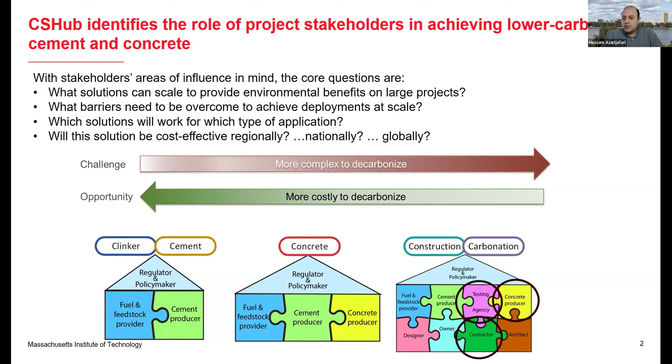This part of the webinar is about the potential impacts of over-design and strength variability on the life cycle carbon emissions of concrete.

Let's start by understanding how over-design contributes to greenhouse gas emissions and costs in ready-mix concrete. Over-design occurs when concrete is produced stronger than the specified strength, creating a safety margin for strength compliance. While this ensures quality control, it has significant environmental and economic implications. As we increase over-design, we need more binder and cement, which directly translates to higher GHG emissions and costs.

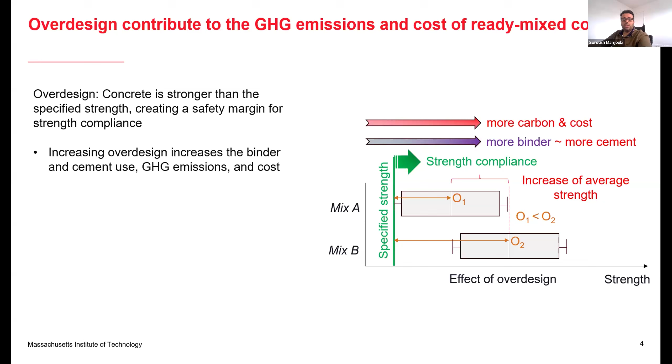This diagram shows two concrete mixes, Mix A and Mix B, where Mix B has greater over-design than Mix A, represented by orange markers O1 and O2, showing the relationship between over-design levels and environmental impact.

Now let's examine the quantitative impact of over-design across different strength classes. We define over-design as how much the observed average strength exceeds the specified strength, using the formula shown here. This violin plot shows the distribution for a 2000 PSI mix, where the average over-design exceeds 50%, with the 95th percentile reaching about 120%, and the median sitting around 50%.

Our analysis reveals a pattern: lower strength mixes carry the highest over-design, with some exceeding their specified strength by up to 150%. But for higher strength mixes above 6000 PSI, the average over-design drops to less than 25%. This is because higher strength mixes are more expensive to produce for ready-mix companies, and achieving strength beyond specification is already more costly for these productions.

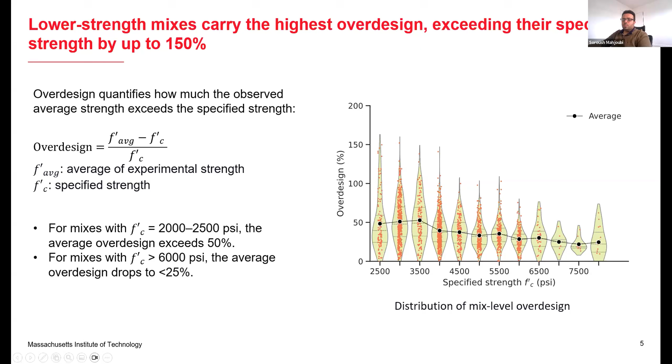Now we investigated the over-design compared to the ACI safety margin, and our study shows that over 90% of mixture codes exceed the conservative ACI safety margins.

These violin plots show the distributions of observed compressive strength, found using experimental tests, across different specified strength levels. The green and blue lines represent the minimum required average strength without sufficient historical data according to ACI 318. These thresholds are conservative, and it's logical that the mix codes lie inside the green space shown in this figure. But we can see that most of the average strengths consistently fall well above these conservative thresholds, suggesting there is significant room for over-design optimization without compromising safety, which could lead to substantial reduction in carbon emissions and costs.

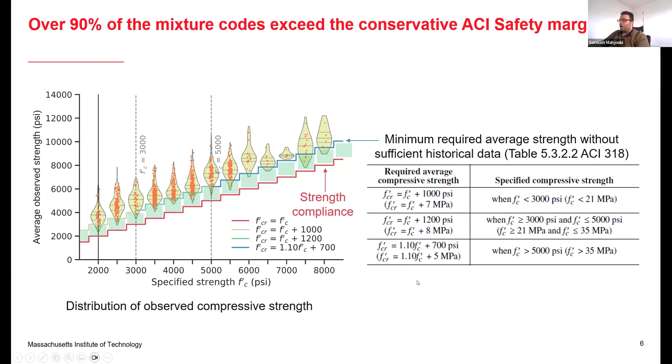Beyond over-design itself, strength variability plays a crucial role in driving carbon emissions and costs. Variations in strength indirectly increase the over-design because producers must maintain a safety margin to ensure compliance.

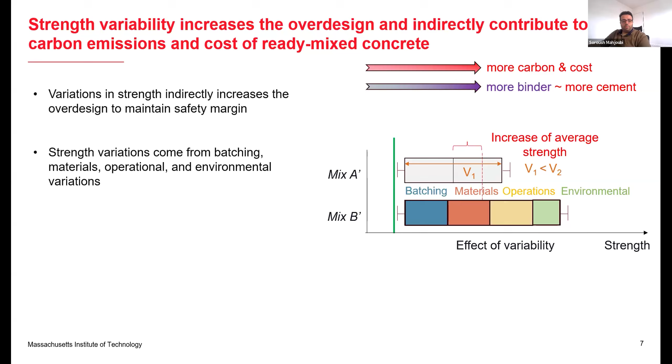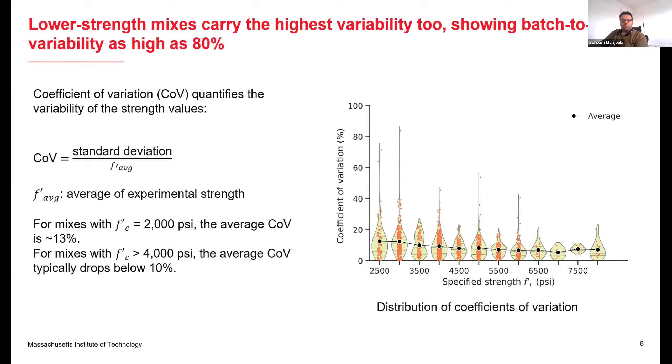Just as we saw with over-design, lower strength mixes also exhibit the highest strength variability. We quantify this using the coefficient of variation, which is the standard deviation divided by the average experimental strength. These violin plots show the coefficient of variation, demonstrating that variability decreases as specified strength increases. For 2000 psi mixes, the average coefficient of variation is around 13%, with some batches showing variability as high as 80%. These extreme batch-to-batch variations across mixture codes create significant quality control challenges. In contrast, for mixes above 4000 psi, the average coefficient of variation typically drops below 10%, primarily because of better quality control in these more costly productions.

We have also investigated the impact of laboratory test variations on strength over-design and variations. External laboratory testing introduces another critical source of variability that significantly impacts concrete strength compliance and risks, and this is part of the operational variations.

Our analysis shows that internal labs report a coefficient of variation of around 6%, while external labs can reach up to 13% for this specific mix code, due to inconsistency in sampling, handling, and testing procedures. The higher variability directly translates to increased non-compliance rates, with external labs showing failure rates of 3.6% and 4.5% compared to internal labs. These non-compliance risks create substantial business impacts, including costly rework and project delays.

The coefficient of variation also differs across different labs, as you can see in the blue lines in this figure.

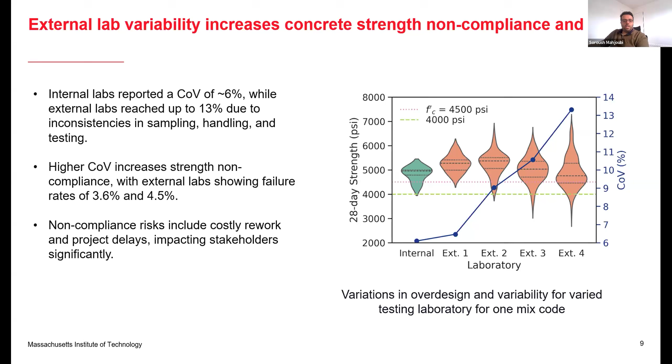To quantify the carbon impact of over-design, we developed a comprehensive data-driven modeling approach using batch-level operational data. This figure shows the fundamental relationship between carbon emissions, mix proportions, and observed strength.

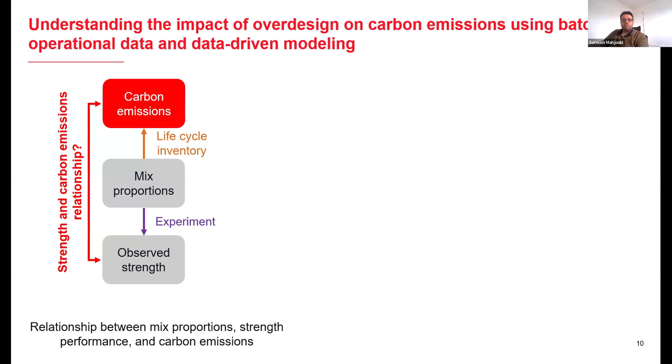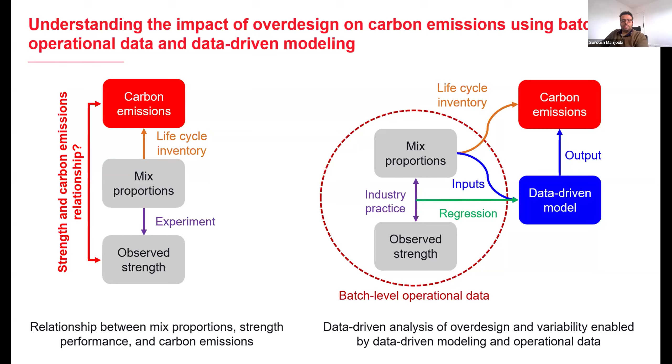This is how the mix proportions relate to observed strength and performance. On the right-hand side, our integrated modeling framework combines real industry practice data with regression analysis to create a data-driven model that connects observed strength with carbon emissions. By using actual batch-level operational data, we can capture the true environmental impact of current industry practices and over-design.

We developed a simple symbolic regression model to establish a relationship between mix proportions and GHG emissions. On the left-hand side you can see the goodness of fit for this model, and the root mean square error is about 7 kilograms CO2 per cubic meter. On the right-hand side, these figures represent the relationship between the 28-day observed strength versus the cement clinker, SCM percentage, and admixture dosages.

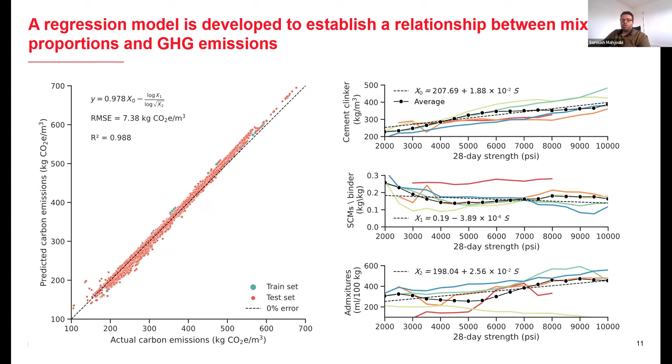Each line color represents a company, and as you can see here, each company has its own strategy in strength gain. We use the linear regression model here as input to the symbolic regression model, and at the end, we're able to relate over-design and strength variability to the excess carbon emissions.

In these two plots, I'm showing the over-design percentage and coefficient of variation against the excess GHG emissions for different specified strengths. We can see that by increasing the over-design, the carbon emissions increase linearly, but the impact of over-design increases as the specified strength increases.

And on the right-hand side, we considered 99% compliance with a z-score of 2.33. And we use the ACI formula to relate the strength variations to the overdesign here.

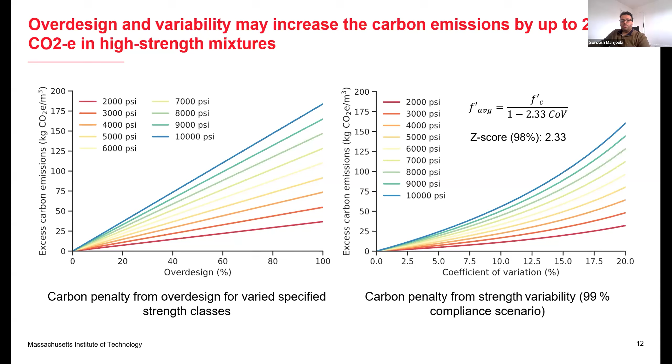And we found that, again, the coefficient of variation has a significant impact on the carbon emissions, and the relationship is non-linear. For higher strength mixes, the impact is more significant, and it can induce carbon emissions up to 200 kilogram per cubic meter for high strength mixes.

Here, we developed an overdesign versus coefficient of variation space, and we wanted to show the excess carbon emissions in this space. Each dot represents a mix code in industry, and we compared the average overdesign and coefficient of variation with 99% compliance according to ACI, and no excess overdesign.

So for 4000 psi here, we can see that there is a gap between the average and the no-excess-overdesign dot, which represents an opportunity to reduce the overdesign but keep the safe margin up to 99% compliance.

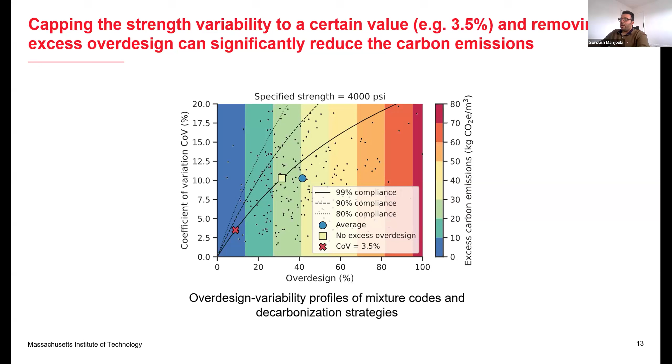And there is another opportunity here, which is that we can actually reduce the coefficient of variation and reduce the overdesign together to achieve higher GHG gains. We consider 3.5% coefficient of variation here just to show that we can have higher GHG gains by doing that.

Okay, the next part of this presentation is about the impact of different input variations, such as materials, batching, and plant variations, on the strength of concrete. We use an interpretable AI method called SHAP to get some insights from the predictions of the machine learning model.

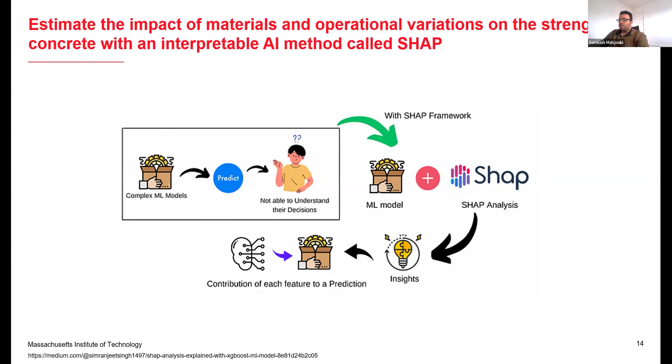As you can see in the black box predictions, we have a complex machine learning model, and we are not able to understand the decisions of this machine learning model. But with the SHAP framework, we can actually get some insights and find out the contribution of each feature to a prediction.

By using the SHAP model, we could identify the influencing factors. On the left-hand side, this is the goodness of fit for the machine learning model, a gradient boosting machine that predicts the observed 28-day strength based on mix proportions, physical and chemical properties, and operational conditions.

We considered the ready-mix plant, laboratory, and projects as input variables for this machine learning model, and there are over 30 different input features. I've shown you only 5 of them on the right-hand side that have the highest influence on the predictions. We found that cement clinker, for example, has the highest impact on the compressive strength, along with limestone content, etc. These are the intrinsic features we considered.

But we have also considered operational features, such as the ready-mix plants, laboratory, and projects, and these variables have a significant influence on the predictions as well. For example, the ready-mix plant can increase or decrease the compressive strength by over 1000 psi, showing the variations in handling and mixing across ready-mix plants.

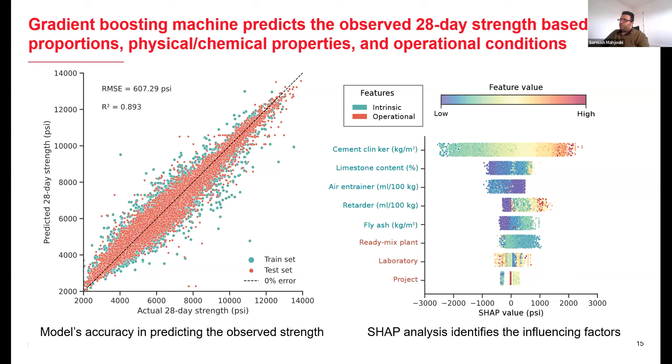By standardizing these procedures, we can achieve some GHG gains and reduce GHG emissions by improving quality control in the ready-mix plants. The same applies to the laboratories—we can see that the laboratory has an impact on the compressive strength too, leading to a reduction or improvement in strength.

We were also able to find and quantify the impact of plant, projects, temperature, and material variations on mix codes.

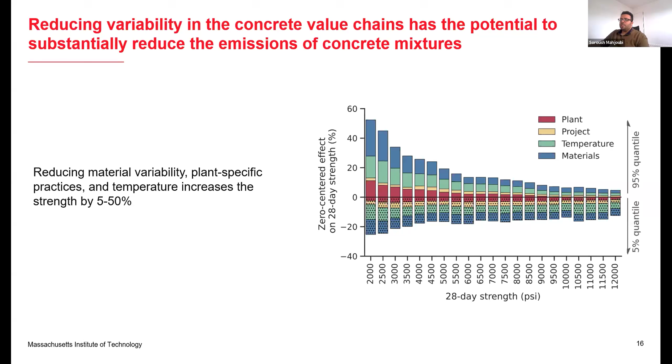We were also able to decompose the coefficient of variation using the SHAP explainer, and we found that we can categorize these variables into batching, materials, operations, and environmental conditions.

We found that batching variation is the dominant source of variability and can explain about 40 to 50% of strength variations within the mix codes. Material-related variations also explain about 40% of the variations in the mix codes, and the rest goes to operational variations, which is about 5 to 20%.

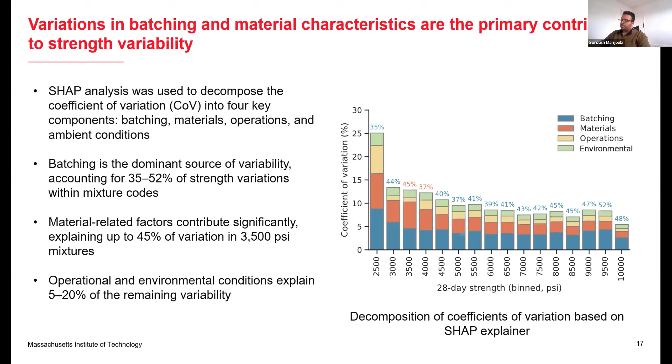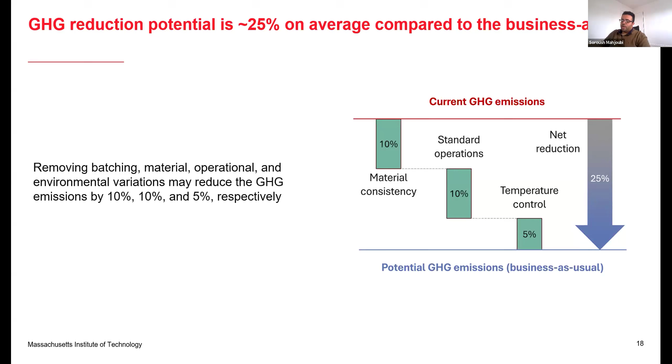At the end, we translated these variations into GHG savings, and found that by removing the batching, material, operational, and environmental variations, we can reduce GHG emissions by 10%, 10%, and 5% respectively. In total, the GHG reduction potential is about 25% on average for different specified strength mixes.

At the end of this study, we translated the GHG savings for each state within the United States, and also calculated the cost savings based on the average cost of mix codes in the industry. We found that by optimizing the overdesign and removing the batching, operational, and material-related variations, we can annually reduce GHG emissions and costs by 10,000 kilotons and $2 billion.

And these savings are higher for Texas, California, and Florida, because of the supply of ready-mix concrete.

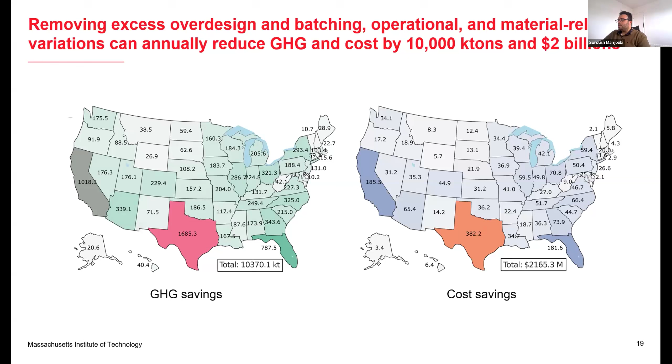Here are the takeaways from this study. Overdesign is significant in industrial mixes, and 92% of the mixes overshoot ACI targets. The variability sources were studied, and intrinsic batching variations and plant and lab variations each explain 40% of strength variations on average.

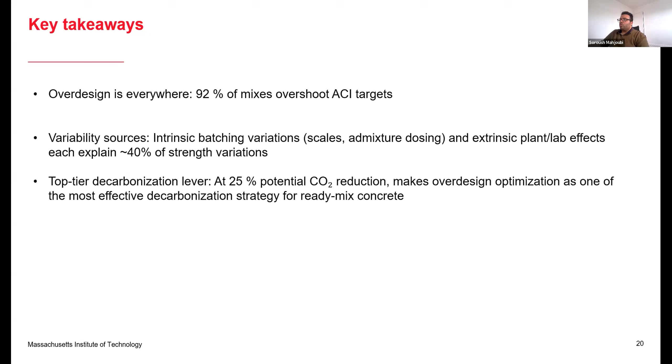This is one of the top tier decarbonization levers, and we can potentially reduce GHG emissions by 25% through overdesign optimization.

We can consider precise strength testing, use proper sampling techniques, and maintain consistent material handling to improve within-batch quality and variations. We can also reduce batch-to-batch variations by ensuring uniform quality and proportions of ingredients, controlling the water to cementitious materials ratio, and avoiding retempering.

On the training and education side, we can conduct regular technician training programs, provide comprehensive instructions for end users, and utilize automated systems for real-time monitoring in concrete manufacturing at ready-mix concrete facilities. At the end, we can encourage testing agencies to upgrade testing facilities for better precision and accuracy.

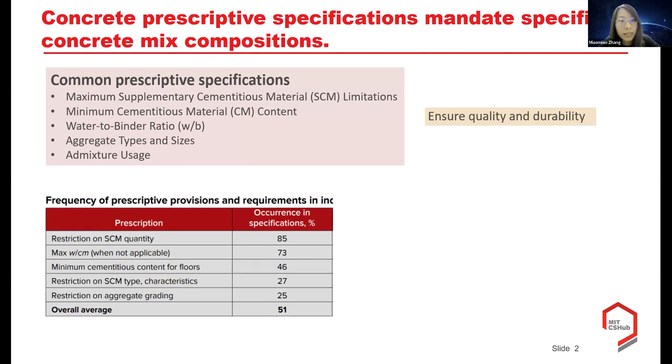This table lists the high-ranking prescriptive specifications. This shows a minimum cementitious material requirement from MassDOT and the SCM content requirement, which differ across SCM types. These prescriptive specifications are designed to ensure the quality and durability of concrete products.

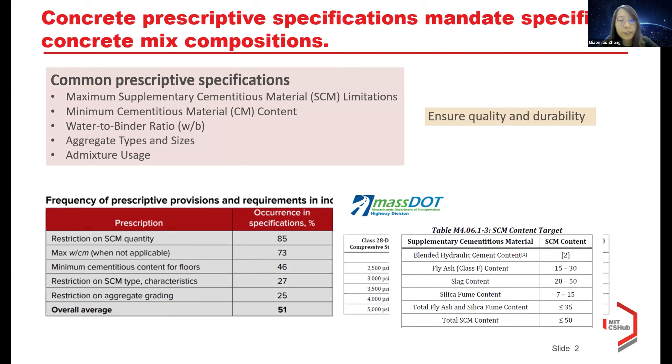However, they may have some limitations or negative impacts. First, they impose constraints on concrete mixtures and limit flexibility in concrete production. For example, requiring a minimum cementitious material mass can lead to overdesign and resource inefficiency, as Soroush explained. Additionally, prescriptive specifications often restrict the use of low-carbon materials like fly ash and slag, leading to higher GHG emissions.

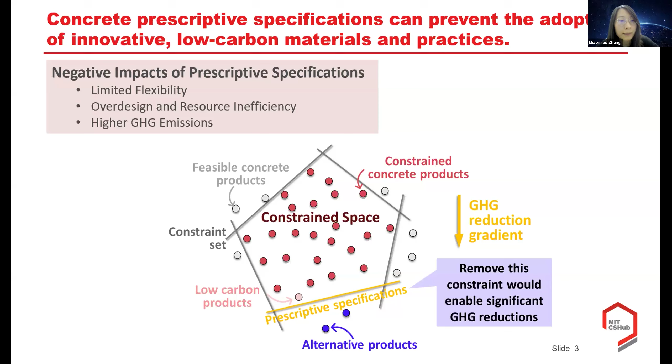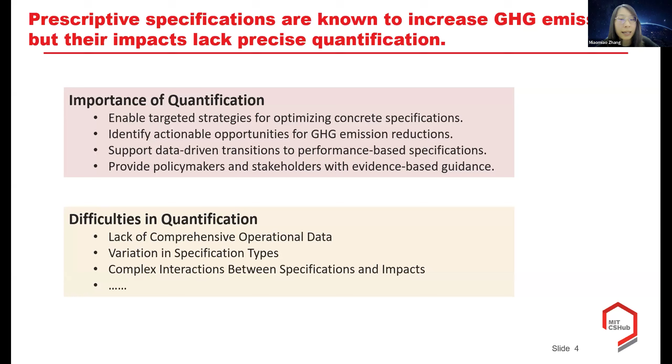So it's widely recognized that concrete prescriptive specifications contribute to increased GHG emissions, but there is a notable lack of quantitative analysis to precisely measure this impact. Quantifying the GHG impacts is crucial. However, there are some difficulties in the quantification, such as the lack of comprehensive operational real-life data, the variations in specification types, and probably it will involve complex interactions between specification and the impacts. So it increases the difficulties in the quantification.

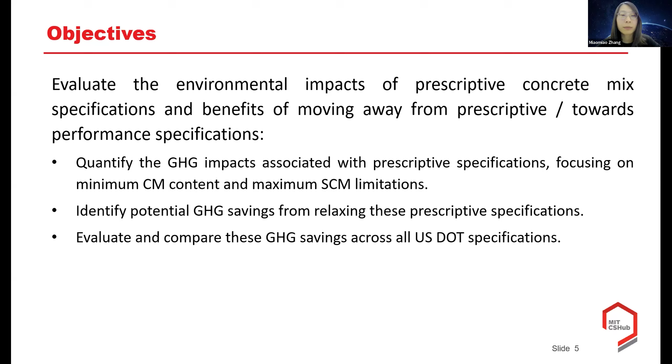Therefore, our objective is to evaluate the environmental impacts of prescriptive concrete mix specifications and the benefits of moving away from prescriptive specifications. We are quantifying the GHG impacts associated with prescriptive specifications, focusing on minimum cementitious material content and maximum SCM content limitations. Identify potential GHG savings from relaxing these prescriptive specifications, and evaluate and compare these GHG savings across all US DOT specifications. So this research aims to quantify the GHG impact of concrete prescriptive specifications by exploring the relationship between concrete mix characteristics and GHG emissions within the context of state DOT specifications.

Using the spec-aware model, we can analyze concrete products within the constraint space defined by the customer requirement. By inputting the constraint space into the model, we can evaluate all concrete products that meet these constraints and identify low-carbon concrete products within the constraint space.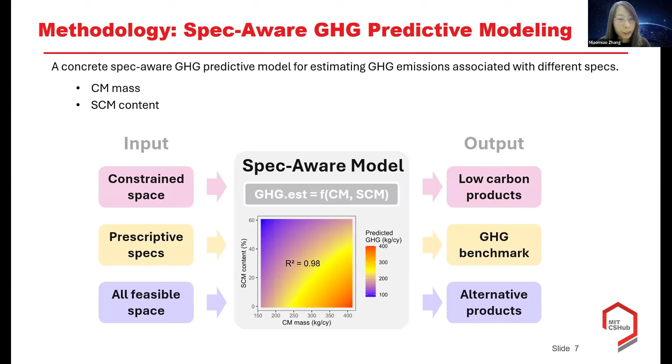When we input the prescriptive specifications into the spec-aware model, it will calculate the associated GHG emissions, which we refer to as the GHG benchmark. The GHG benchmark is the lowest GHG that can be achieved when meeting the specs. Additionally, if we expand the analysis to include the entire feasible space of concrete products, the spec-aware model can help us identify alternative products with even lower GHG emissions.

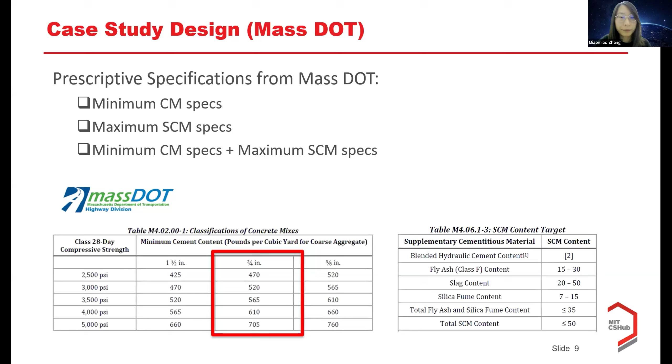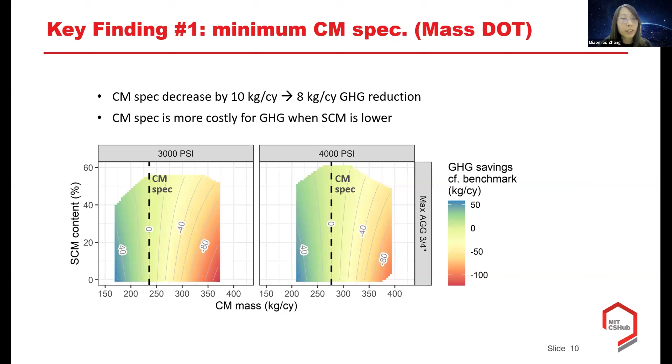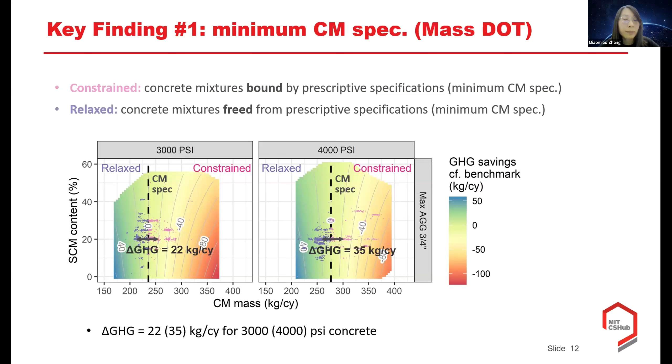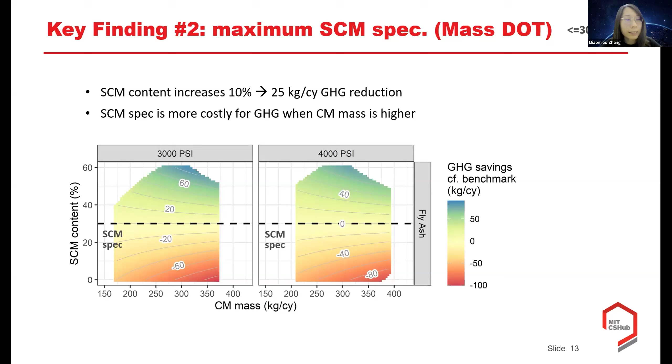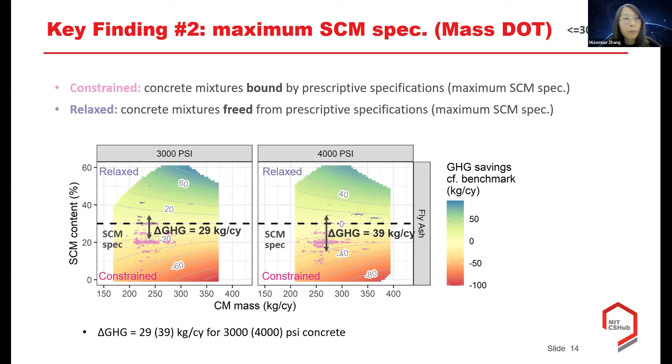We also investigated the actual GHG savings based on operational data, as shown in these scatter plots, and we classified the concrete products into constrained and relaxed groups based on the SCM specs. Then we compared the GHG emissions between the constrained and relaxed groups. The average ΔGHG is about 29 kilogram per cubic yard for 3,000 PSI concrete and 39 kilogram per cubic yard for 4,000 design PSI concrete mixtures.

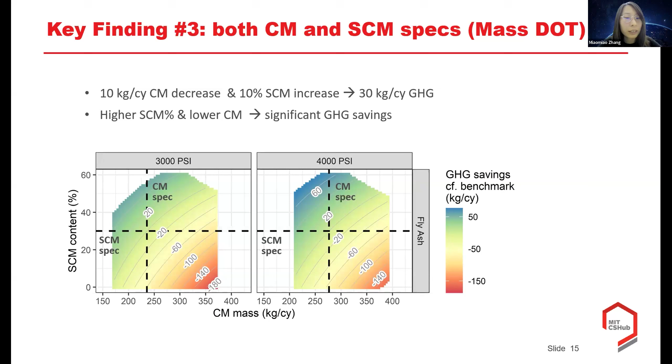At last, we applied the minimum CM specs and maximum SCM specs simultaneously. The dashed lines in this figure represent SCM specs and CM specs, and the crossover point represents the GHG benchmark, representing zero GHG savings, with a GHG reduction gradient of about 45 degrees. A higher SCM content combined with lower cementitious material mass leads to lower GHG emissions and significant GHG savings, while lower SCM content and higher CM mass leads to higher GHG emissions and negative GHG savings. Combining these two impacts, a 10 kilogram per cubic yard CM decrease combined with a 10% SCM increase leads to about 30 kilogram per cubic yard GHG reduction.

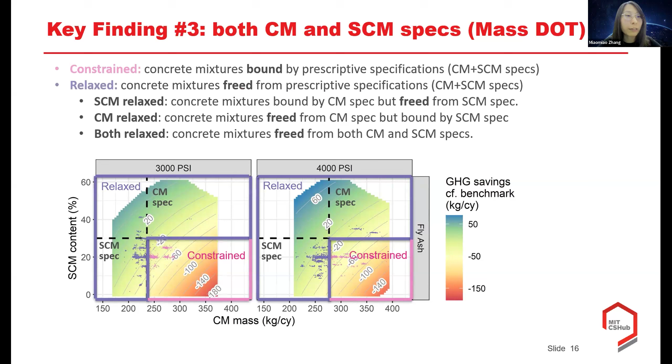In this figure we have the constrained and relaxed groups, and within the relaxed group we have the SCM relaxed group — concrete mixtures bounded by CM spec but freed from SCM spec. We also have the CM relaxed group — mixtures freed from CM spec but bounded by SCM specs. And the both-relaxed group — mixtures freed from both CM and SCM spec.

We investigated the actual GHG savings by comparing these four groups: both constrained, SCM relaxed, CM relaxed, and both relaxed. When comparing the both-constrained and both-relaxed groups, the ΔGHG is about 50 kilogram per cubic yard for 3,000 design PSI and 59 kilogram per cubic yard for 4,000 design PSI concrete mixtures.

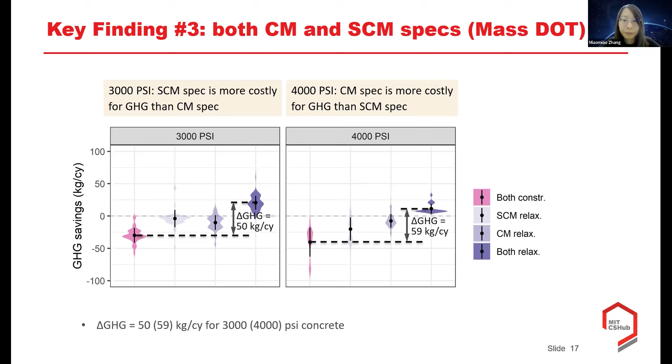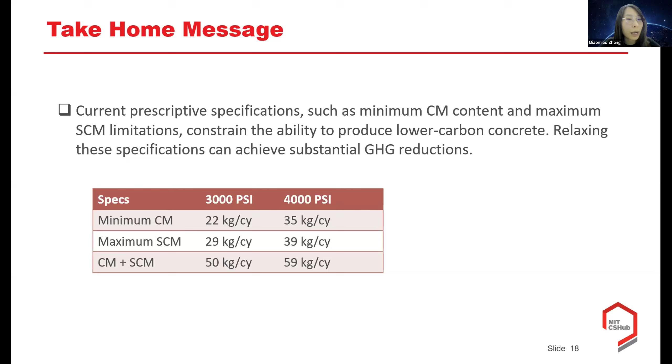So in summary, current prescriptive specifications such as minimum CM and maximum SCM limits constrain the ability to produce low carbon concrete. Relaxing these specs can achieve substantial GHG reductions.

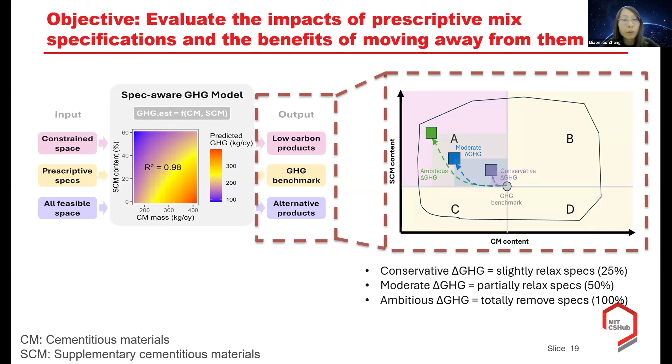In addition to the analysis of one specific state, we also analyzed the GHG savings of all state DOTs and all combinations of CM and SCM limits. As shown in this figure, we developed three scenarios to analyze the ambitious, moderate, and conservative GHG savings from the GHG benchmark. Ambitious ΔGHG represents scenarios where we totally remove specs, moderate ΔGHG represents partially relaxing specs by 50%, and conservative ΔGHG represents slightly relaxing specs by 25%.

Based on the literature investigation, we found that all states and DC have prescriptive specs that increase GHG emissions. 32 states and DC limit both CM and SCM, 6 states limit CM only, and 12 states limit SCM only.

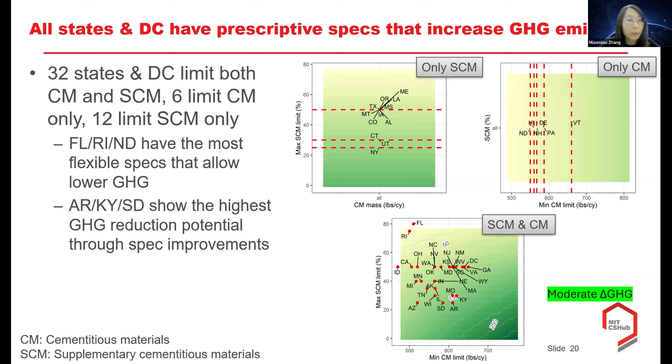Among all states, we found Florida and Rhode Island may have the most flexible specs, which allow lower GHG reduction potential. Arkansas and South Dakota show the highest GHG reduction potential through spec improvements because their current specs are more constrained.

At last, based on the transportation-related cement consumption, we mapped the GHG savings per cubic yard to the total GHG savings for each state at ambitious, moderate, and conservative scenarios. In this figure, you can see Texas and California show the highest GHG savings because they have more transportation-related cement consumption. But their specs are fairly normal — not too constrained or too flexible.

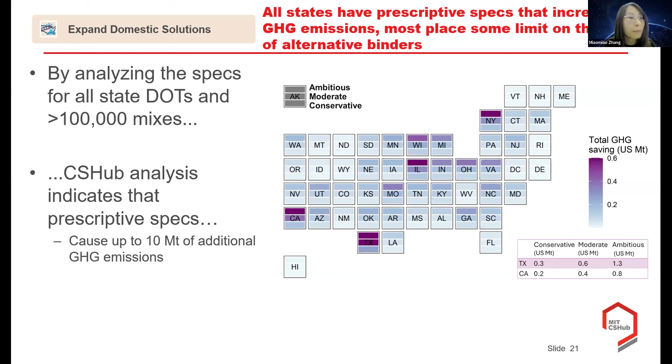In total, our analysis indicates that prescriptive specifications can cause up to 10 million tons of additional GHG emissions at the ambitious level.

Considering the significant GHG reduction potential, our recommendation is to transfer from prescriptive specifications to performance-based specifications. For this objective, we should develop equivalent performance metrics and develop and validate new pilot approaches.